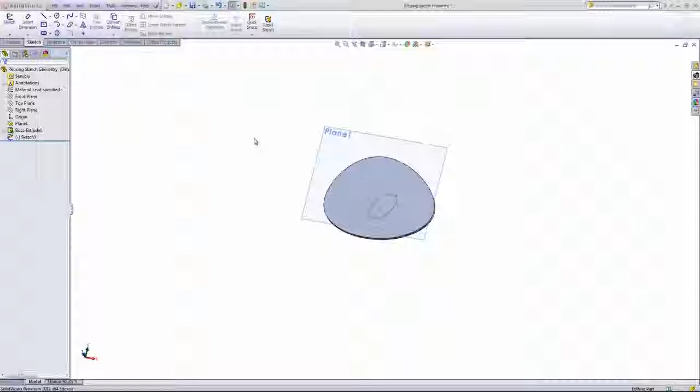There are several tools within the sketch tools that allow you to reuse edges and reuse sketch geometry rather than having to recreate it. They're the convert entities, offset entities, the mirror tool, linear sketch pattern, and circular sketch pattern.

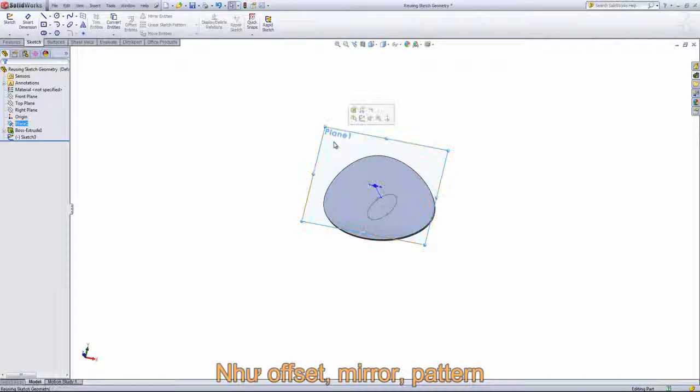So if I create a sketch on plane 1 here, we can start with the convert entities tool. If I select an edge or the face itself and choose convert, it's going to convert over that edge. And then if I were to select the ellipse and click OK, it'll convert that as well.

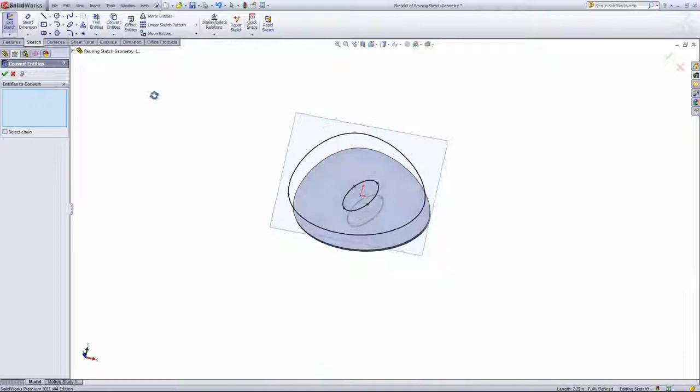Offset entities does much the same as convert entities, except that it creates an offset from the edge. So I can choose this edge, for example, or I can choose the one I just created and offset by 1/4 of an inch.

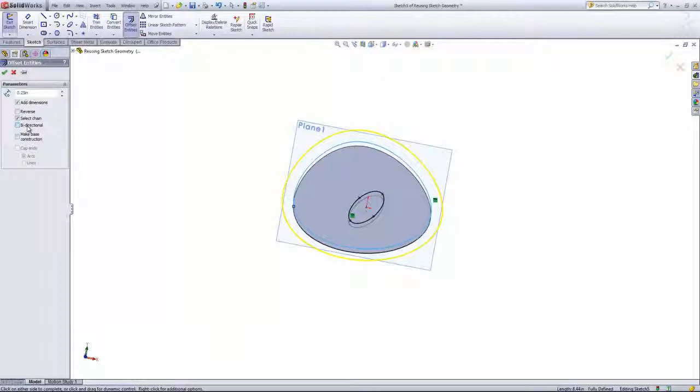And you have several options with the offset entities. You can reverse this or make a bidirectional offset. And you can also add the offset in directly or use that reverse feature just by clicking into the space here, and that'll choose which side to place the offset.

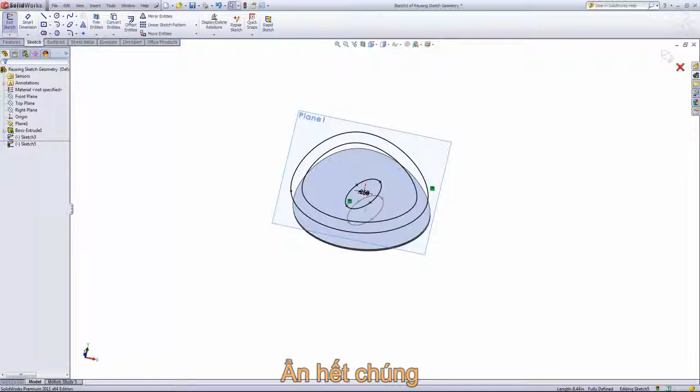So that's the convert entities and offset entities. I'll go ahead and exit out of the sketch, and we'll go ahead and hide out this sketch, hide out the part there, and hide out this sketch as well. And we'll create a new sketch on plane 1.

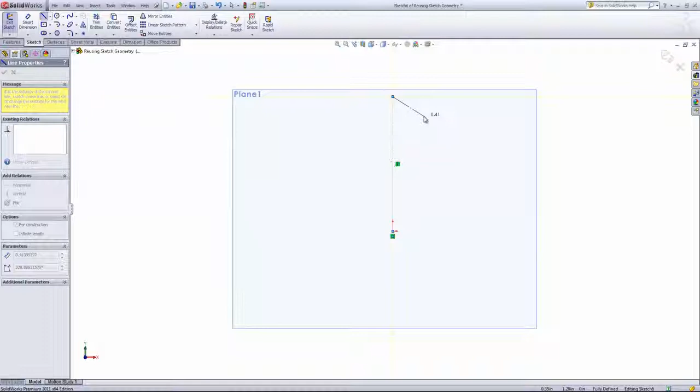I'm going to go ahead and go normal to this so it's a little bit easier to see. And then I'm going to draw in a center line at the origin. Then I'll draw a circle on one side of it.

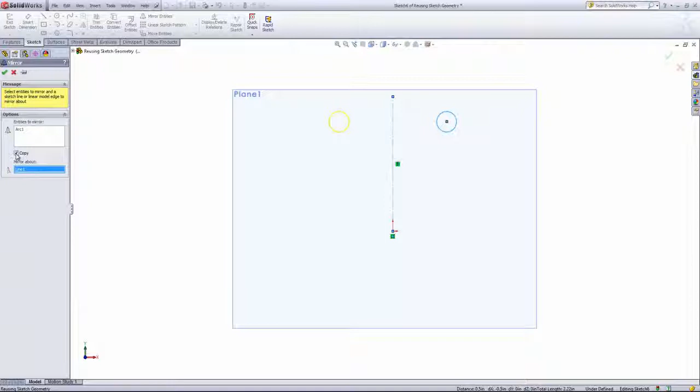And then we'll use the mirror entities. This allows you to select out multiple entities and mirror them about a line. And we have the option of either creating a copy, or if you uncheck this, it'll just move that over to the other side.

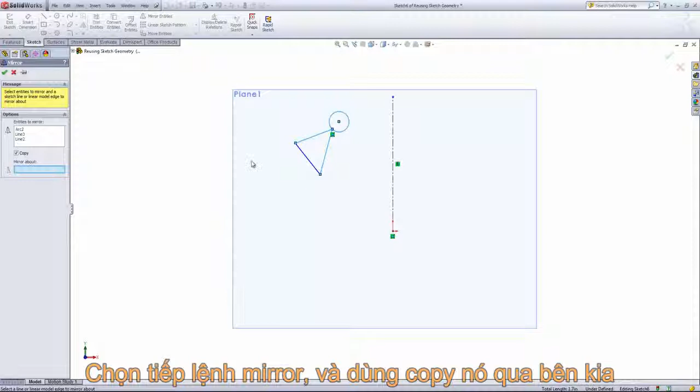So I'll go ahead and draw in several more lines here, and go back into the mirror entities. You can see I can choose out any number of the lines. If I choose that copy option, it'll place a copy of the selected entities on the other side.

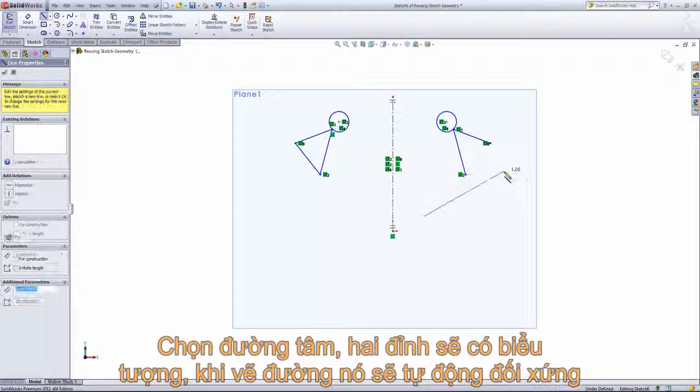There's also an option to mirror dynamically using the dynamic mirror. If we select the center line, you'll see it puts 2 hash marks on both sides, indicating that it is a dynamic mirror. And anything I draw on one side is going to go ahead and drop in on the other.

You'll also notice that if you draw a line directly to the center line, it creates a single entity across as the mirror, as opposed to creating a split entity.

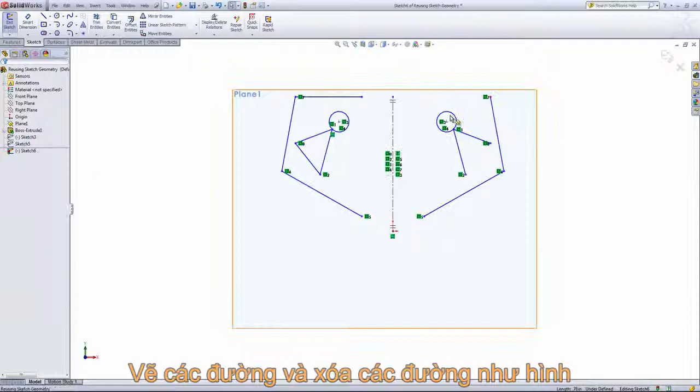One thing you'll want to keep in mind with the dynamic mirror is that when you delete out entities, they won't delete out on the other side.

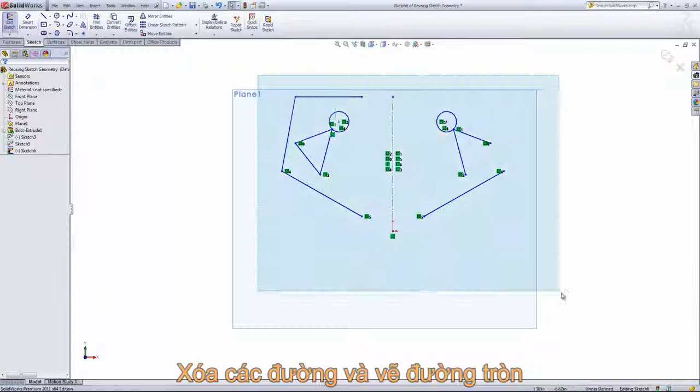So from here, I'll go ahead and turn off the dynamic mirror. We'll just go back into Tools, Sketch Tools, and choose the dynamic mirror option, and that removes out those hashes. And then I'm going to go ahead and actually delete out all these entities.

So the next thing we'll do is draw in a circle here, and I'm also going to draw a point off to the side there. And we're going to create a circular pattern. The circular pattern requires an entity to pattern, and it requires a point to rotate the pattern about.

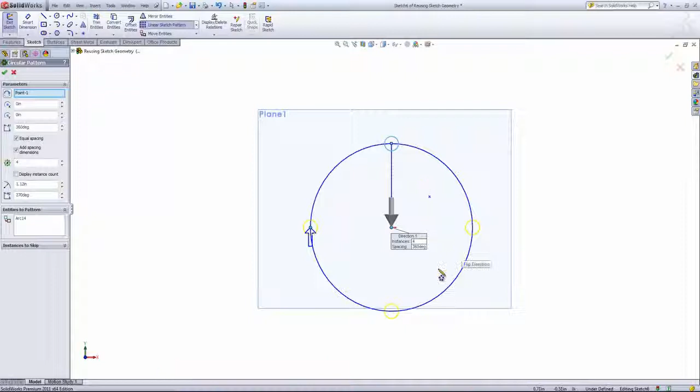We could also change that point by going into that box and selecting a different point there. And you can also change the positioning of the center as long as that point isn't fully defined. You can also change the instance count as well as the size of the radius of the pattern.

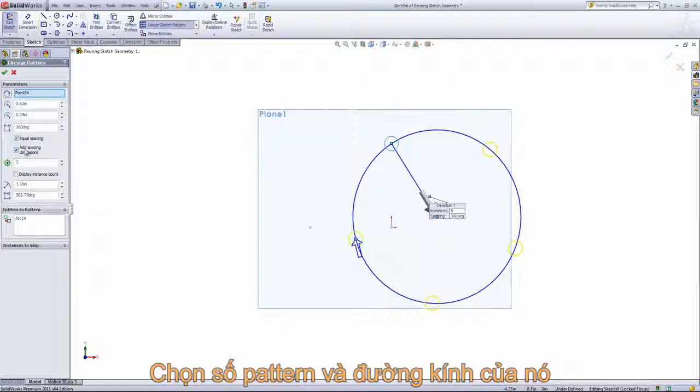And we can also choose to add a spacing dimension or give these equal spacing. The spacing dimension will add a little bit more definition to the pattern so that it's a little bit easier to fully define. And the last patterning tool we'll look at is the linear sketch pattern.

By default, this comes in with direction 1 as the x-axis and direction 2 as the y-axis. If you actually want to use a different direction, you'll need an edge from one of your features.

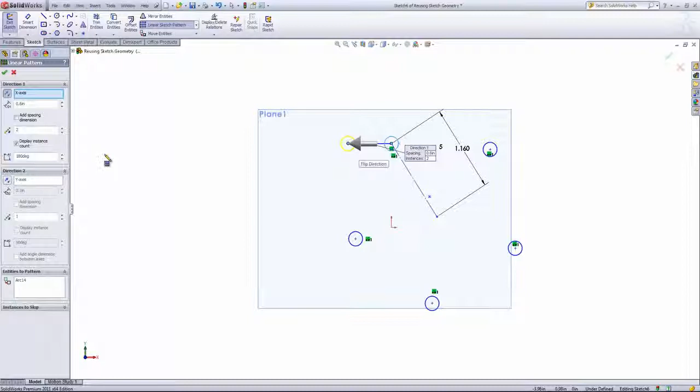And with this, we also have the option of adding that spacing dimension in as well. And we could also fully define this by setting them horizontal to each other and giving them a spacing dimension from the origin.